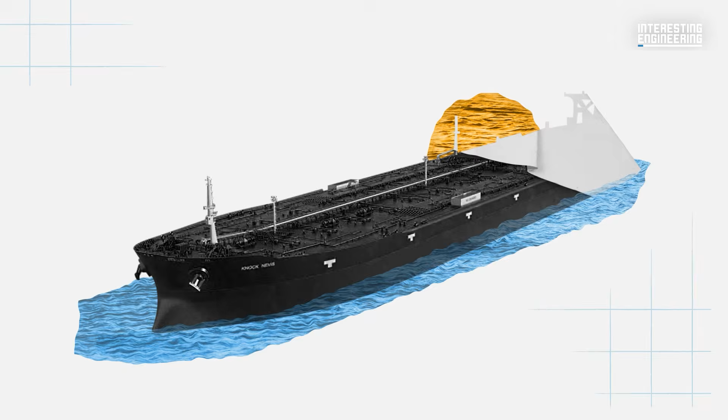ambition, disaster, and rebirth. In 1979, Sumitomo Heavy Industries in Japan completed a ship that would go on to push the boundaries of maritime engineering. Built at Oppama Shipyard in Yokosuka, Japan, to be an ultra-large crude carrier, the vessel, originally named Oppama, measured an impressive 378.9 meters, or 1,243 feet in length.

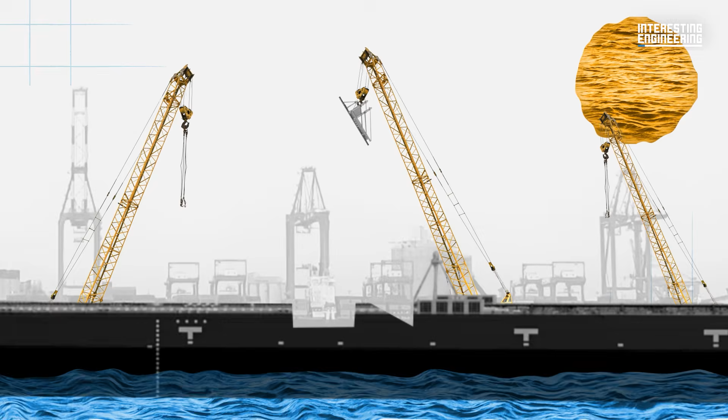However, the construction process saw its share of challenges. As the Giant took shape, the world was changing. The 1973 oil crisis sent shockwaves through the global economy. Suddenly, the economics of supersized oil tankers seemed less certain. By 1979, when construction was nearly complete, the original buyer backed out, leaving the world's largest ship without an owner.

Enter C.Y. Tung, a visionary in maritime commerce. C.Y. Tung was no ordinary shipping magnate. Born in 1912, he built his maritime empire from a single second-hand ship in the 1940s to a fleet of over 150 vessels in the 1970s. Tung was known for his bold vision and willingness to take calculated risks.

His company, Orient Overseas Container Line, pioneered container shipping in Asia. Tung had a keen eye for opportunity and a deep understanding of global trade trends. He firmly believed in the concept of economies of scale in shipping, often saying, "The bigger the ship, the bigger the profit." Where others saw risk, Tung saw opportunity. He understood that despite short-term volatility, the future of global trade would require ever larger ships.

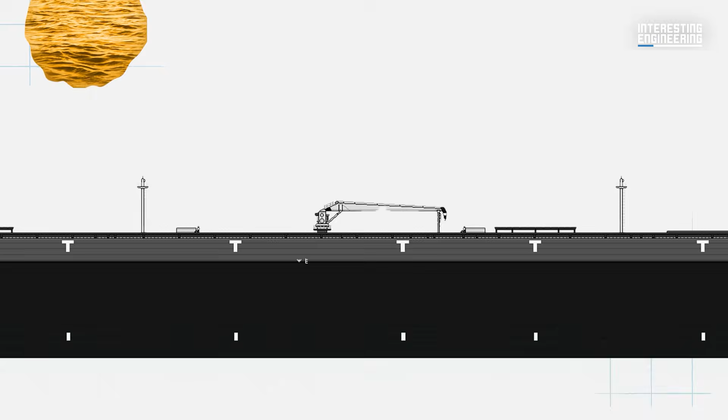In 1981, Tung purchased the ship and renamed it Seawise Giant. But he wasn't content with its current size. C.Y. Tung saw untapped potential in the already massive vessel. Under Tung's direction, the ship underwent a remarkable transformation. It was expanded to an astonishing 458.45 meters, or 1,504 feet in length, with a deadweight tonnage of 564,763 tons. This made Seawise Giant not just the longest ship in the world, but also the heaviest self-propelled object ever built.

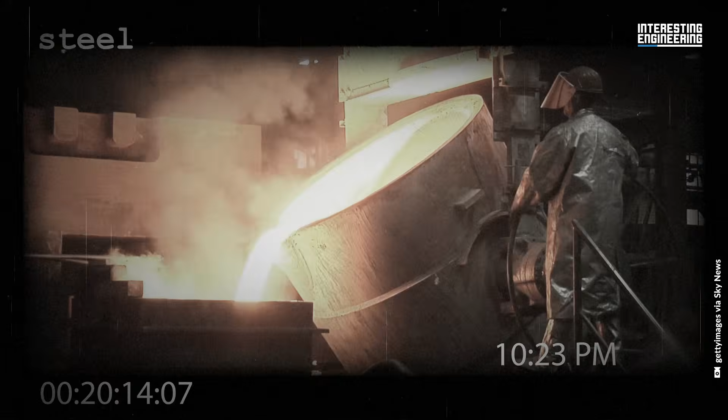The Seawise Giant wasn't just big. It was a masterclass in scaled-up naval architecture. The challenges faced by engineers were immense. At over 1,500 feet long, the ship would naturally twist and bend under its own weight and the relentless forces of the sea. To combat these forces, engineers turned to high-tensile steel, specifically Grade A steel with a yield strength

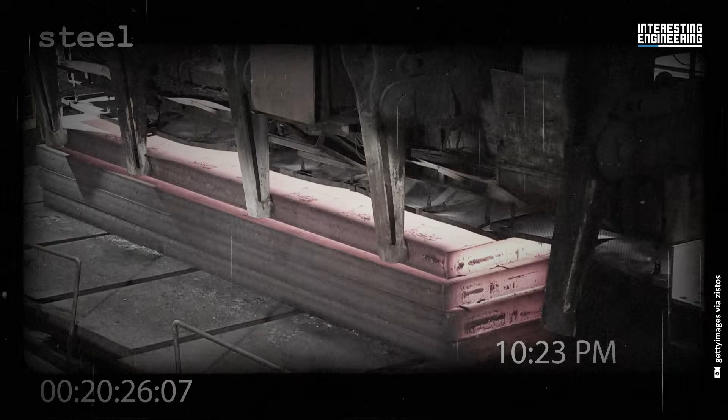of 355 megapascals. To put this in perspective, this steel is about 3 times stronger than the steel used in typical building construction. It can withstand stress equivalent to the weight of 36 large elephants pressed down on every square inch. This material choice was crucial. It allowed for a lighter overall structure while maintaining the strength needed to withstand the enormous stresses of its size.

But material alone wasn't enough. The ship's skeleton consisted of an intricate framework of longitudinal and transverse bulkheads, creating a grid-like internal structure. This innovative design distributed stress more evenly along the hull, preventing localized weak points and reducing the risk of structural failure. The result was a marvel of engineering, a ship that could flex without breaking, withstanding the harshest conditions the open ocean could throw at it.

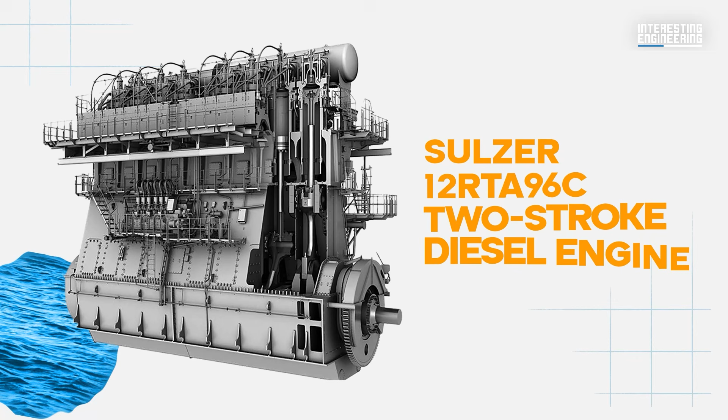Powering this Leviathan was no small feat. The main engine room housed a marvel of engineering, a Hyundai-built Sulzer 12 RTA 96C two-stroke diesel engine. This behemoth produced 50,000 horsepower, or 37,285 kilowatts. To put that in perspective, that's equivalent to the power of 500 family cars. The engine drove a single propeller measuring 30 feet in diameter and weighing 50 tons.

Navigation of such a massive vessel required equally impressive technology. The bridge stretched 98 feet across, wider than many ships are long. It housed state-of-the-art navigation systems for its time, including early GPS technology, radar systems, and computerized charts. But perhaps most crucial was the ballast control room. Here, operators managed the complex task of balancing the ship as its cargo was loaded and unloaded.

To truly appreciate the Seawise Giant, we need to understand its place in the evolution of ship design. In the 1970s, most supertankers, like the Batillus class, maxed out at around 550,000 deadweight tons. The Seawise Giant blew past this limit, reaching 564,763 deadweight tons after its expansion.

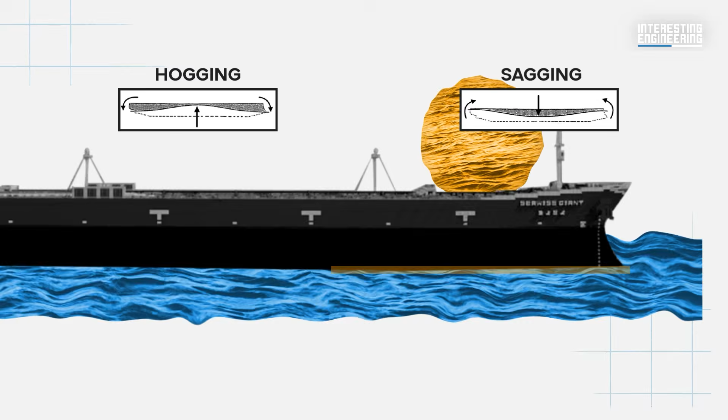This leap in size required rethinking many aspects of ship design. For instance, the hull had to be strengthened to prevent hogging and sagging, the tendency of a ship to bend along its length due to uneven buoyancy forces.

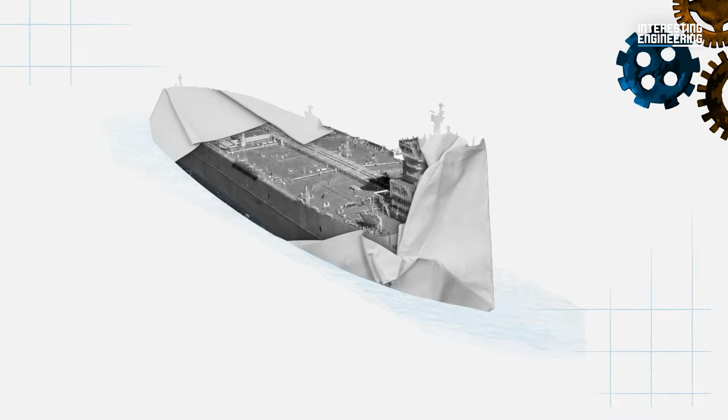The Seawise Giant's influence on future ship designs was significant. While few ships approached its overall size, many of its innovations were adopted in the next generation of ultra-large crude carriers. For example, the double hull design, which became standard in the 1990s, was partly influenced by the structural lessons learned from ships like the Seawise Giant.

Operating the Seawise Giant was a constant exercise in precision and planning. Its massive draft of 81 feet meant it could only navigate in the deepest waters. This restricted its routes and the ports it could access. Loading and unloading presented another set of challenges. The process could take up to 48 hours, transferring oil at a rate of 85,000 barrels per hour.

Crew life on board was unique. With a length greater than many cruise ships, simply walking from one end to the other could take up to 30 minutes, considering obstacles and layout, safety considerations, work-related stops, environmental conditions, personal equipment. The ship's enormous size also made it vulnerable to extreme weather. In high seas, the bow and stern could move independently, creating torsional stresses that required constant monitoring.

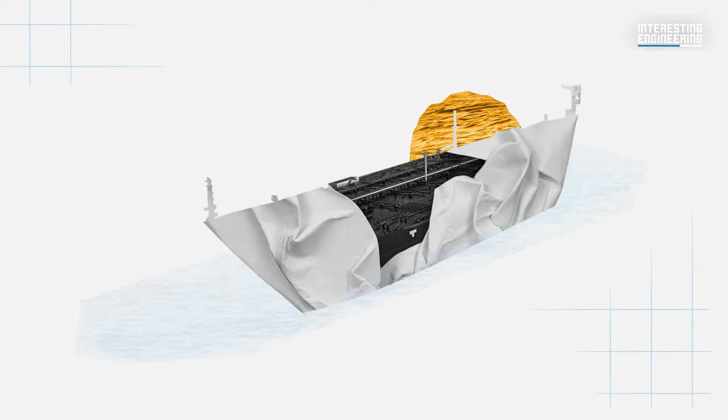The Seawise Giant wasn't just an engineering marvel, it was a game-changer in the global oil trade. Its massive capacity, over 4 million barrels, allowed for economies of scale previously unseen in oil shipping. In a single voyage, it could transport enough oil to meet the daily consumption needs of a country like France for nearly 2 weeks.

However, the economics of such large ships were complex. While they offered unparalleled capacity, they also came with higher operational costs and limited flexibility. The Seawise Giant's story paralleled the boom and bust cycles of the global oil market, reflecting the industry's constant balance between capacity and demand.

In 1988, disaster struck. Caught in the crossfire of the Iran-Iraq War, the Seawise Giant was hit by Iraqi missiles. The damage was catastrophic. Fires raged across the deck and in the surrounding waters. Declared a total loss, it seemed the end for the world's largest ship. But the Seawise Giant's story wasn't over. In a feat of engineering audacity, a Norwegian company, Norman International, decided to salvage the Giant. The operation involved replacing 3,700 tons of steel, equivalent to half the weight of the Eiffel Tower.

Reborn as the Happy Giant, the ship returned to service in 1991. Over the next decade, it would change hands and names several times. Originally built as Oppama, it became Seawise Giant under C.Y. Tung's ownership. After its repair, it was renamed Happy Giant, then Jahre Viking under Norwegian ownership.

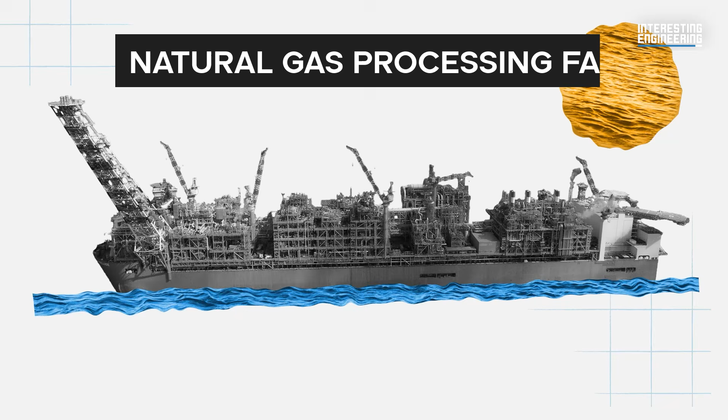458.45 meters. Its legacy lives on in modern megaships like container vessels and floating production storage and offloading units. However, the Seawise Giant remains unmatched as a mobile vessel. The Prelude, designed as a stationary natural gas processing facility, builds upon the engineering feats achieved by the Giant.

The challenge of building bigger while maintaining efficiency and safety continues to drive innovation in naval architecture and marine engineering, from massive container ships like the Ever Ace to floating production storage and offloading units like the Egina. As we look to the future, the spirit of innovation embodied by the Seawise Giant continues to inspire new generations of maritime engineers. In 2009, the Seawise Giant made its final voyage to a ship-breaking yard in Alang, India.

As impressive as the Seawise Giant was, it also highlighted the environmental challenges of massive ships. Today, the maritime industry is using lessons from the Seawise Giant to build more efficient and environmentally friendly vessels. The Seawise Giant was more than just a ship. It was a floating testament to human ingenuity, a challenge to the limits of marine engineering, and a harbinger of the future of global trade. Its legacy lives on in every ultra-large vessel that sails the seas today, a reminder that with vision, skill, and perseverance, we can build the impossible.